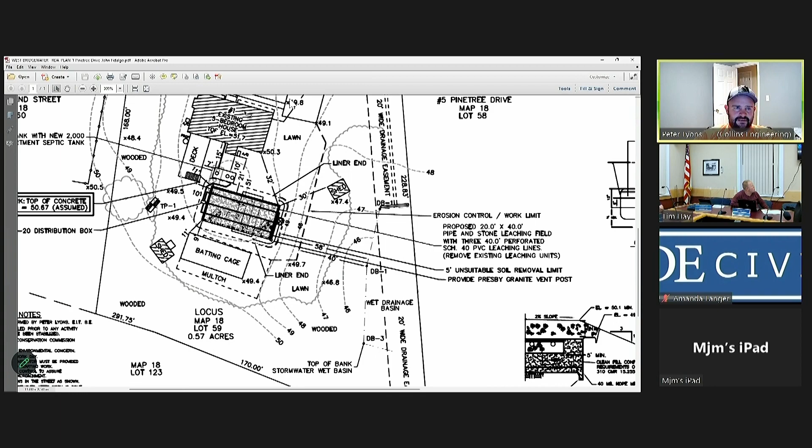I can't even tell, Peter, are there wetland lines there or not? There is, just with the drainage basin right here. We have a couple of flags shown as the top of bank for the stormwater basin, and that's the extent of the resource on the property. That's the actual wetland line - it was kind of a man-made wetland line from the drainage easement for the subdivision when it got built. They drained it out to that area.

So I was wondering how old it was. Yeah, it's been established for a while. Well, again, determination, everything comes here anyway. Right, they're not going into that area.

The only question I have, Peter, is that it didn't appear on this plan - you normally have under your wetland and erosion control notes, number 5, a 2-day notification before construction starts. If you could make that note change, I'll put it as one of the conditions, just so I can check the erosion control and make sure it's there. It's on all the other plans, it just missed this one. Okay, I'm just reading through them quick, I don't see that exact wording.

It asks the contractor to provide their contact with the commission. Yeah, what you normally do is have the Conservation Commission must be contacted a minimum of 2 business days in advance for erosion control and other applicable inspections. Okay.

So there's not really much, you're just going to take it out, put a new one in, and then reseed it and let it go at that, right? Yeah, correct.

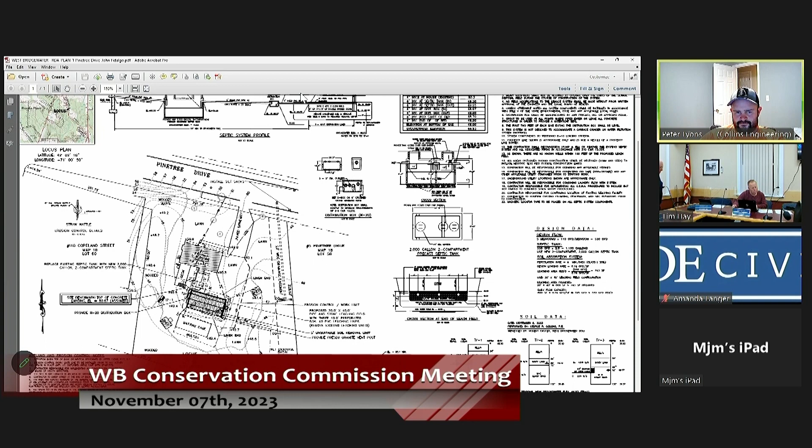Okay, anybody else? I'm all set. So, entertain a motion to close the hearing. Motion to close? Second. All in favor? Aye. Entertain a motion to issue a -3 determination with conditions. I'll make that motion. Second. All in favor? Aye. All set.

Thank you. He's up for the next couple. For you, couple more, okay. Well, here's the coming next one on 132. Which is the next one?

Okay, so the next one is 132 Brooks Place. I'll read this one in. Under the Wetlands Protection Act, Chapter 131, Section 40 MGL, as amended, the West Bridgewater Wetlands Protection Bylaws and Rules and Regulations, the West Bridgewater Comprehensive Stormwater Management Regulations, the Conservation Commission will hold a public hearing on November 7th, 2023 at 6:30 p.m. in the McDonald Brown Conference Room, 65 North Main Street, on a notice of intent at 132 Brooks Place for a septic system upgrade.

Okay, all set. Just confirm we can see the plan again. For the record, Peter Lyons again, Collins Civil Engineering, representing the owner at 132 Brooks Place.

This is a notice of intent relative to the repair of a failed residential septic system. This site's a little tighter than the last one. It is less than a half-acre lot with wetlands cutting through the back of the site. Wetland flags 1 through 13 are shown by the bold green line. The 50-foot buffer is shown in orange, and the 100-foot buffer is purple. Pretty much nowhere on this site is outside of jurisdiction.

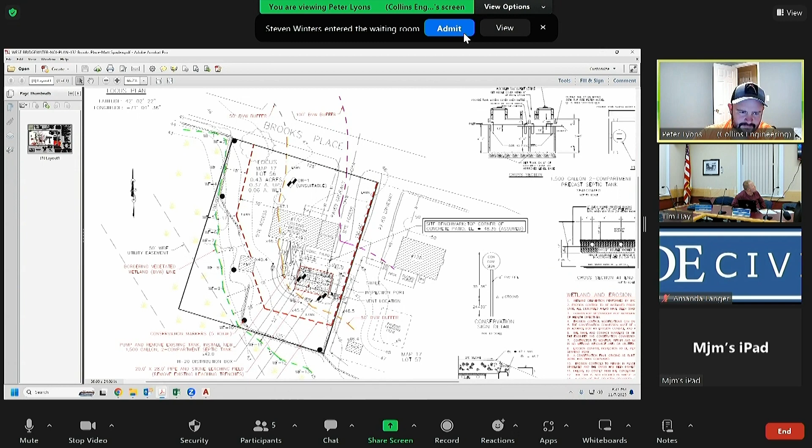Let's see, our standard notes here, which include notifying the Conservation Commission 2 business days prior for erosion control inspections. That's kind of my quick rundown. If the commission has any questions, I'll take them at this time.

Thank you. So now this one's just failed. Is it going to be sold too, or no? Yes, it is going to be sold. Oh, okay. So those markers are right on the wetland line, is that from what I can see from here? Some of them are exactly on the wetland line.

It's all previously disturbed lawn area. I did make a site visit. The house looks unoccupied at this time.

I understand. Only comment I have for this was, I would make a suggestion that we add a marker between wetland flags 6 and 7. On the site visit, that area is all grass going literally right into the wetland. It looks like they've been putting all their yard debris and everything right into it.

So they'll stop. Yeah, and if it's being sold and a new property owner's going in, that access point right through the back - could you show us where that is that you're talking about? Yeah, it would be right here. Okay.

If you want, I do have some pictures I can share. But that would be my only suggestion. Everything else looks good. Not much you can do about it anyways.

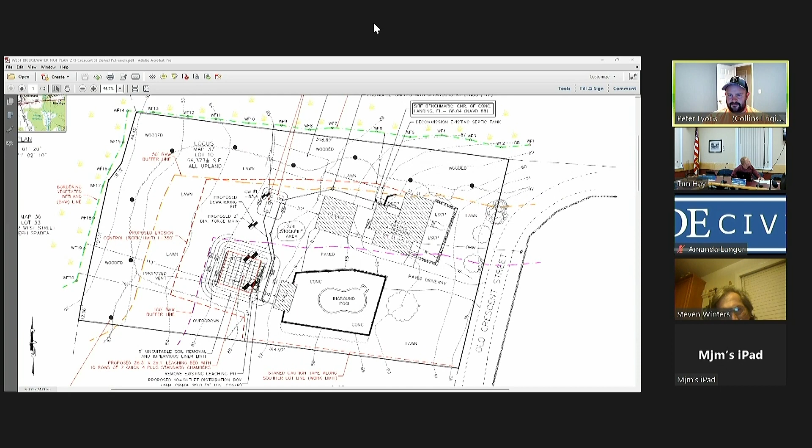Basically, this site, we encountered very high groundwater and pretty poor soils, resulting in a pump system and a pretty large leaching field, a large elevated leaching bed. Basically, we're decommissioning, pump and fill the existing septic tank to the north of the house and abandoning the existing leaching field, which does go into the tree line. That will just be abandoned in place.

We're providing new plumbing to a 1,500-gallon septic tank, 1,000-gallon pump chamber, and then, as mentioned, an elevated 28 by 29 leaching bed of plastic leaching chambers. This is coming up about 3 to 3.5 feet above existing grade over the leaching field, with minimal grade change, a foot or less, over the proposed tanks.

This is all occurring in the existing lawn area. You can see the tree line shown pretty much parallels or offsets the property lines. We have proposed conservation markers along the existing tree line in 9 locations as shown on the plan, wrapping around the entire site on the existing tree line.

The limit of work is defined as the bold red line here, encompassing the entire excavation area as well as the site access, which will occur through the driveway. We've also shown some caution tape, a work limit along the southern line, just to make sure everything happens within our property limits.

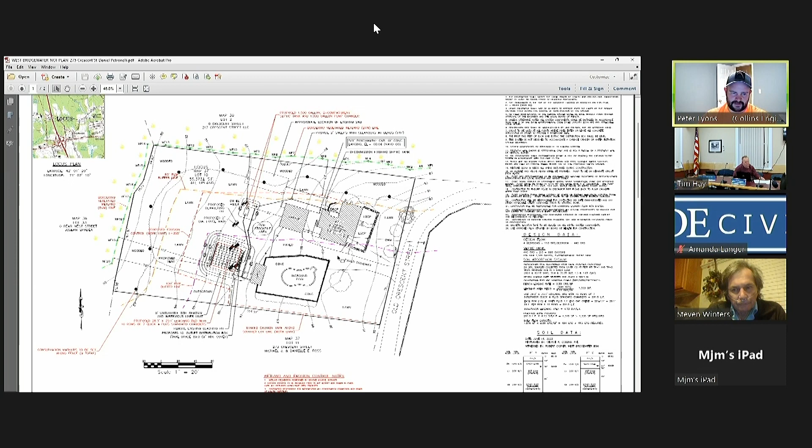It's essentially like half of a barrel. The stuff that comes into the leaching field goes into a tunnel. The bottom of it is the sand bed, and the top is a domed plastic panel. So nothing, no plastics are leaching into the resource area or anything.

Thank you. Now, is this house being sold too? No, I don't believe so. Okay.

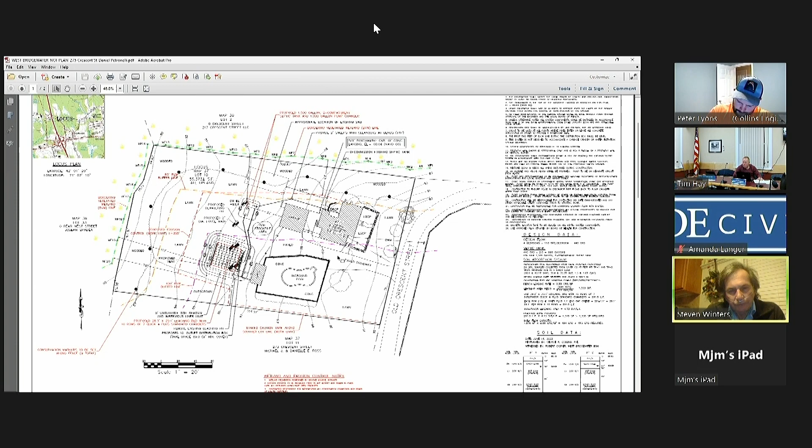Any more questions? I've done the site visit already, and they're mostly outside the 50-foot for the construction, just the decommissioning area would be inside it. There were no posts before? No.

Okay, so I'll entertain a motion to close the hearing. Motion to close? Second. All in favor? Aye.

Entertain a motion to order standard orders and conditions. So moved? Second. All in favor? Aye.

I'll entertain a motion to grant a waiver to work in the 50-foot buffer. I'll make that motion. Second. All in favor? Aye.

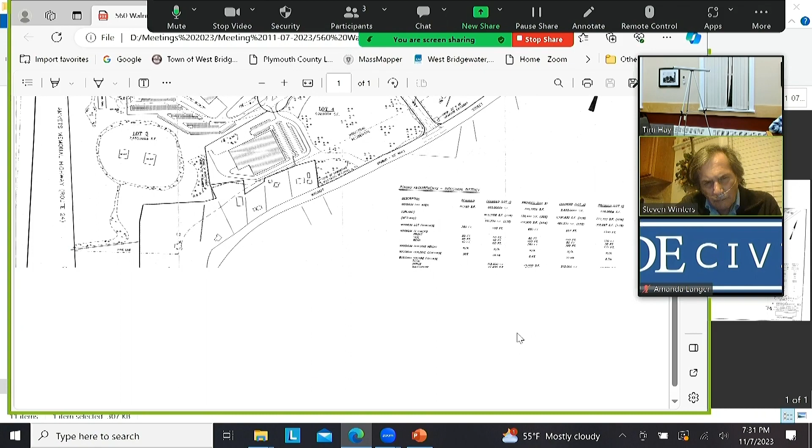And they had 1, 2, 3, 4 warehouse type structures. Again, this is 97, pre a lot of the stormwater regs that are there now. So considering that, some of this would probably not work at the site. But they did, in 97, have this, let me make sure, yeah, February 27th, 97 was the date of the plan.

But it did show the ring, and it showed this area here that was pretty defined, and if you look, it's probably larger than what shows on this plan. It does not show any connectivity to this little spur of wetland, where there's a drainage pipe that goes under the road, I believe, or exits that area, looking at some of the imagery. So that's where I ran into trouble trying to figure out what and where it was connected to.

Was this area here filled in when the road came and it blocked or stopped the connectivity, and that's why that culvert's there to bring it across? And the state wouldn't have any say in this? Have an idea whether it's wetlands or not? Or is it they're leaving it up to the town?

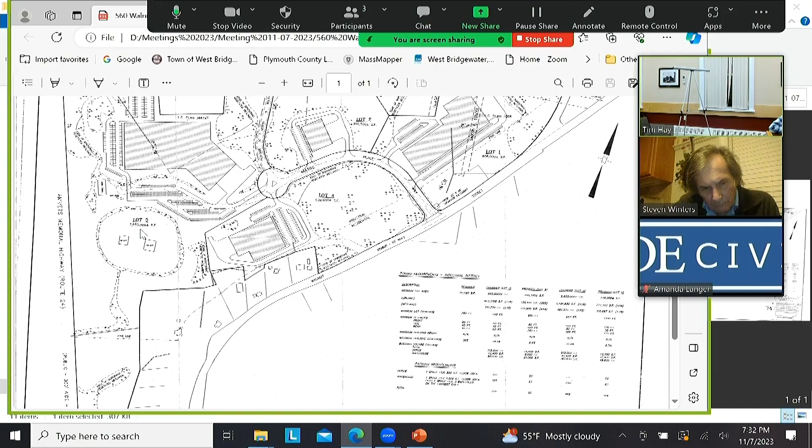Jurisdiction on it? Well, where there's nothing permitted and nothing on it, the records are gonna have both ends. I mean, my only suggestion might be to take some soil samples and just see what the hydrology is there in the mowed area, and find out. I mean, it doesn't look like a wetland, but a lot of farm fields don't look like wetlands because they were farm fields.

This one doesn't look like it had crops, so it hasn't been plowed and harrowed and disturbed, it's just been mowed. Even the trees growing up through the ditched area, are they wetland? Yeah, you can see it's full of water, it's considered wetland. And the area's what been flagged in general, the whole area hasn't been flagged.

Not yet. Do you think that will change dramatically from what you think is there, or did you just walk it to get a rough idea? Exactly, so we didn't go through the effort of hanging flags because on this site it's going to be a massive effort.

But as you can see, just on this one, when they did it for this structure, this is all wetland around it, this is all wetland too, wetlands right here potentially. So it doesn't match necessarily DEP's imagery. If you look at DEP's imagery, there's little wetlands here, a little pocket over here, I think there's another one in here, and then down south.